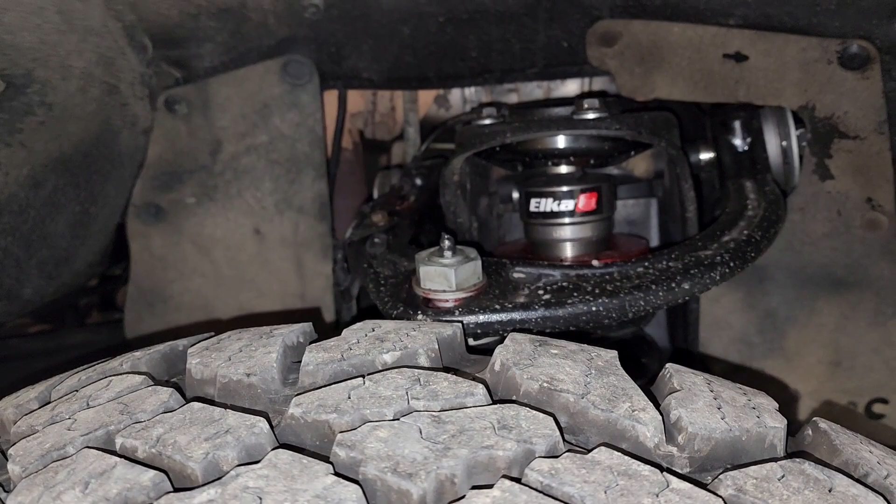So I'm gonna give you guys a quick look of what I've done so far, and then we'll get right into today's video. If you've watched my recent videos, you would have seen I was doing a bunch of work, changing out the suspension and other stuff. Over in the front here, I got my Elka coilovers, got those installed, and up top here I got the SPC adjustable upper control arm.

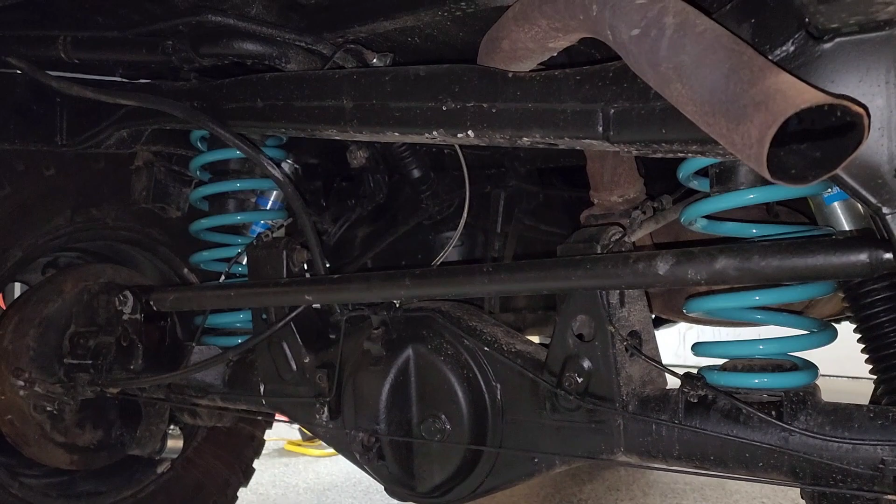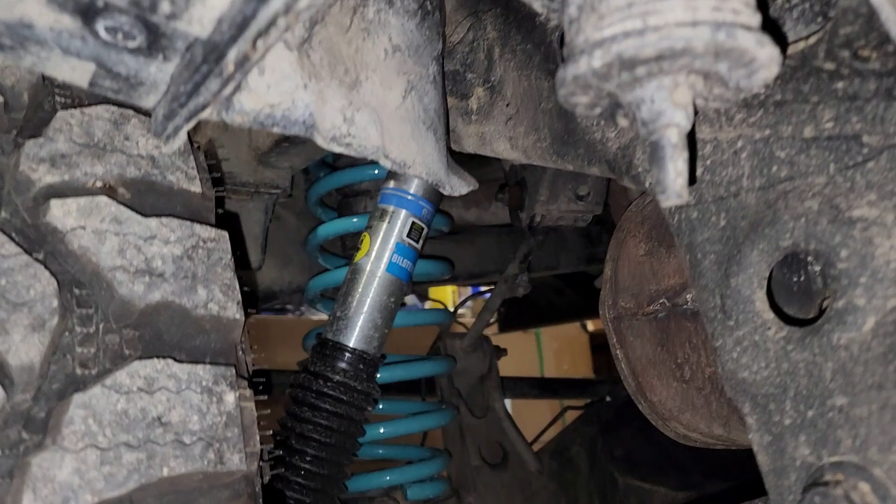Over in the back, got the new Dobinson's Land Cruiser front springs, paired with the Bilstein 5100 shocks. Those shocks are actually for the 4th and 5th gen 4Runner, so it gives you a little bit of extra lift on the 3rd gens. That's the main thing I've done, and then of course I got the 5.29 Yukon gears and my 35-inch tires.

So the last thing left to do before I can get this thing back on the road is get an alignment, which I have an appointment for in a couple of days. But before the alignment, I actually have one last thing to install, and I'm really looking forward to it. So I'm gonna give you guys a look at what it is, and then we'll get into the install. All right, so this is what I got right here.

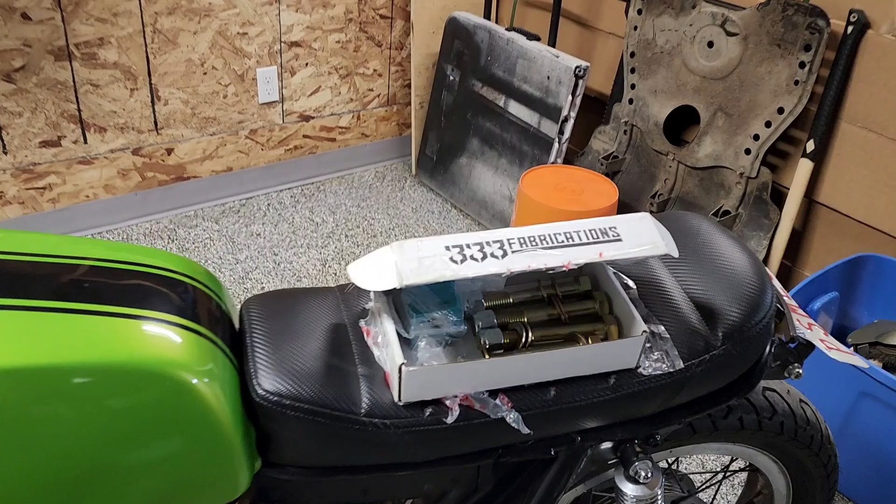This is the Cam Eliminator Kit I got from 333 Fabrications. I'll link it in the description below. It comes with these nice big bolts - when I get the old ones off we'll do a quick comparison, I'm pretty sure these are much beefier. It comes with some instructions, just a QR code, and it comes with the plates.

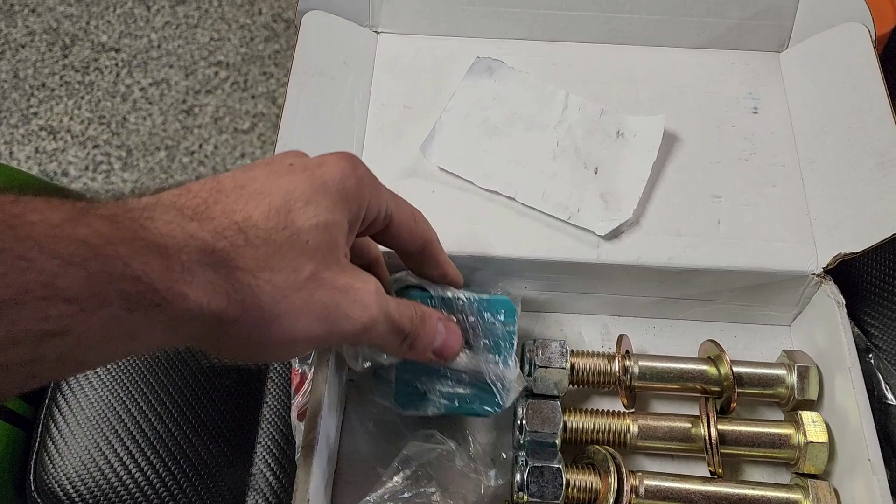So these actually come bare steel. I got them powder coated this color only because I got my rear springs coated in the same color, and it was cheaper to just do the same color. That's why they're blue, and I think they'll look pretty cool.

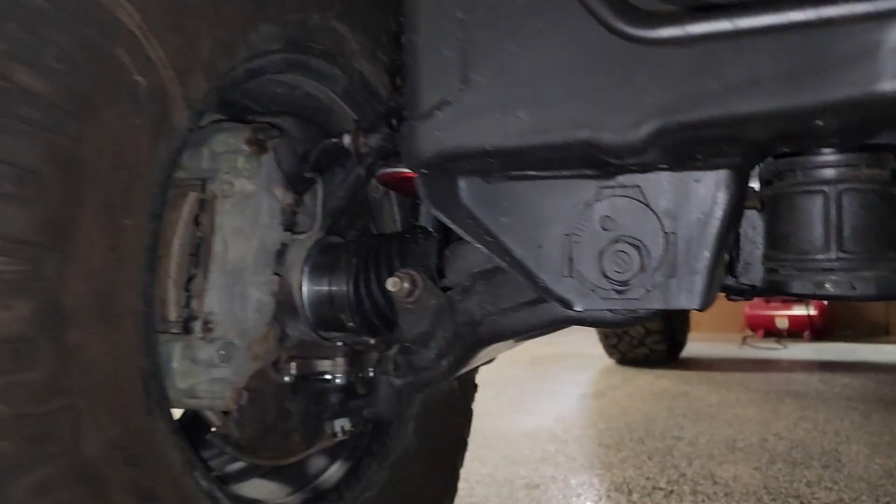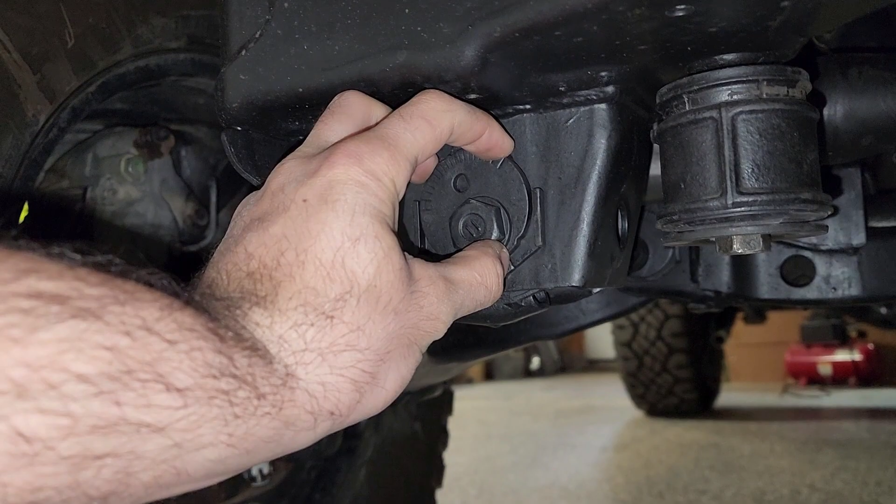So let's have a quick look on how this actually works and what the purpose of it is. If we get to the front of the vehicle, on the lower control arm here you have these adjusters, one in the front here and one right on the back. This round thing - basically you loosen this, turn it, and you can adjust it that way. Because it's round, the idea is if you're doing really hard off-roading, this thing can spin and mess up your alignment.

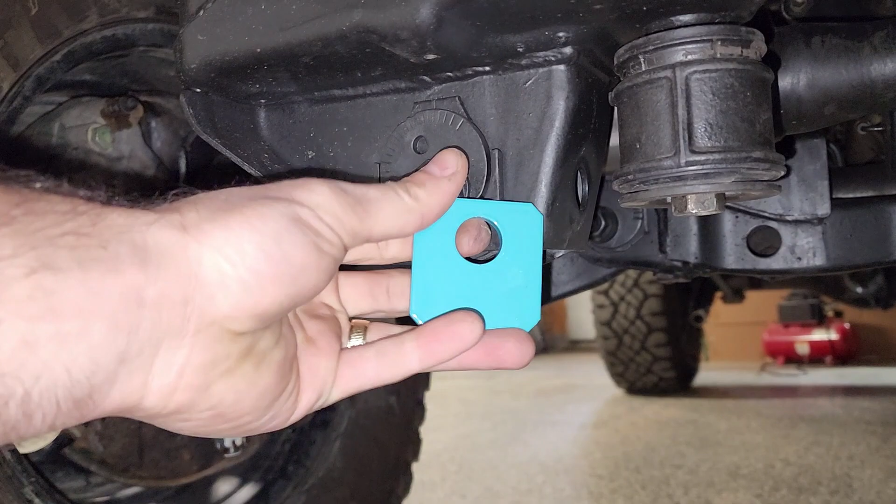So that's where these come in play. Because of the shape of this, because it's square, it's going to replace the round thing, and it's going to be locked against that right there. So once that's in, there's no way for this to spin around. Once it's in, it goes either like this or like this, I believe, so you get 3 adjustments. But once it's in, like I said, there's just no way for it to spin. Hence they're called the Cam Eliminator Kit, and they're supposed to keep your alignment permanent.

Now one thing to note is that it's very common for these 3rd gen 4Runners to have these bolts completely seized, and you may need to cut it. If that's the case for you, good luck, it's a bit of a pain. Mine fortunately are not seized because I did get an alignment like a year ago, so I know they're not seized. So I'm just gonna pull these off, replace them with new ones, and we'll be good to go. So let's get started.

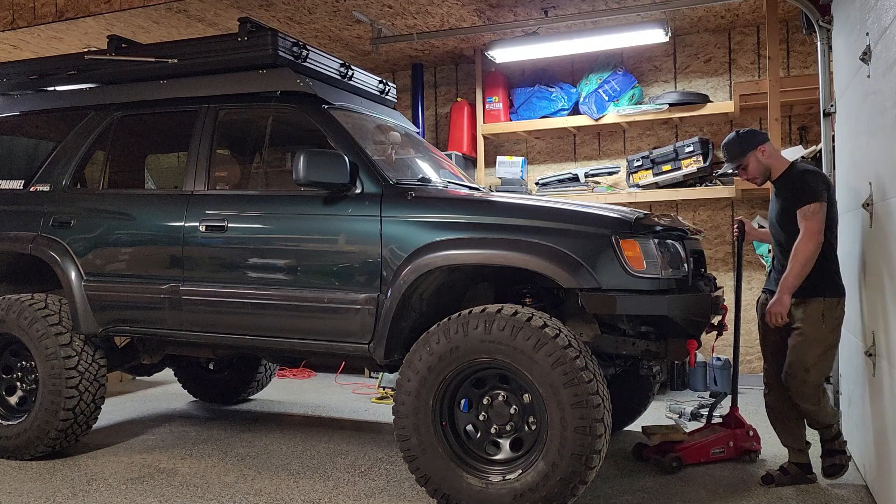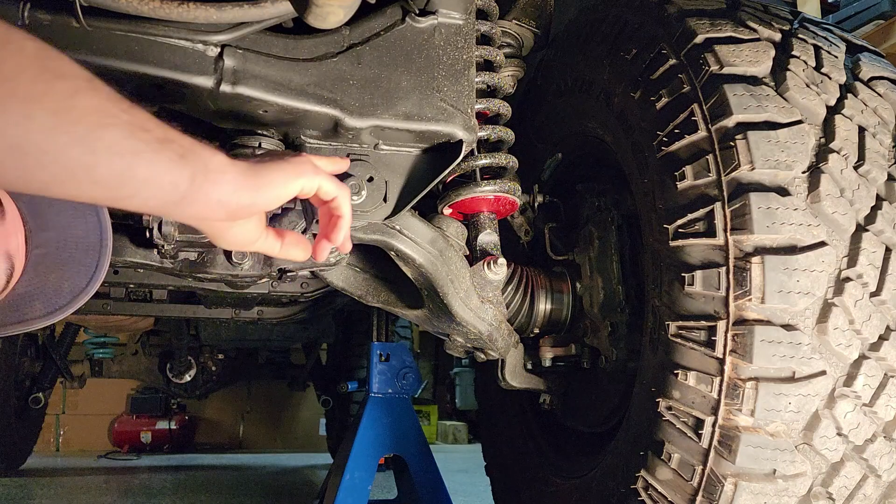So I have gone ahead and loosened this one already, so I'm just gonna go ahead and take it out. So there it is. And just to do a quick comparison, you can clearly see the difference.

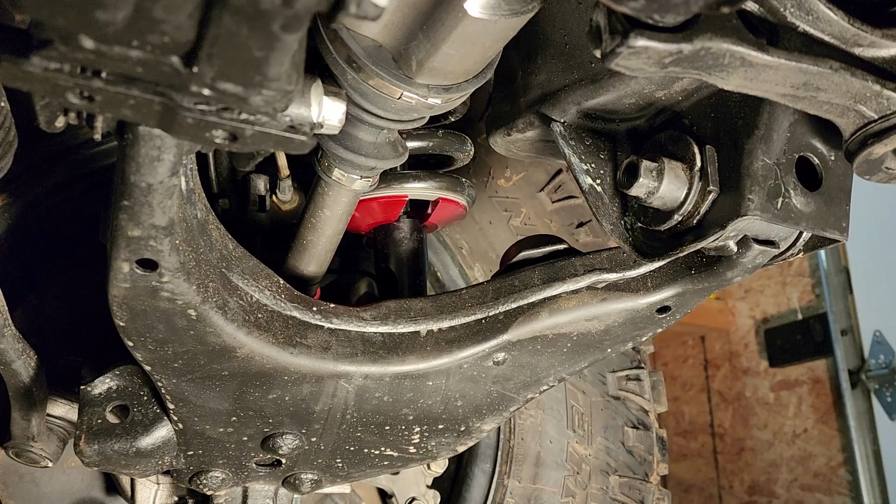All right, so with that bolt out, over on the back here, right here, we can just pull this off. I just used a little pry bar in there just to kind of pry it a little bit - it's already loose so it just comes right off. Now this here, we can just use a rubber mallet to hammer it, and it should just slide out from the front here.

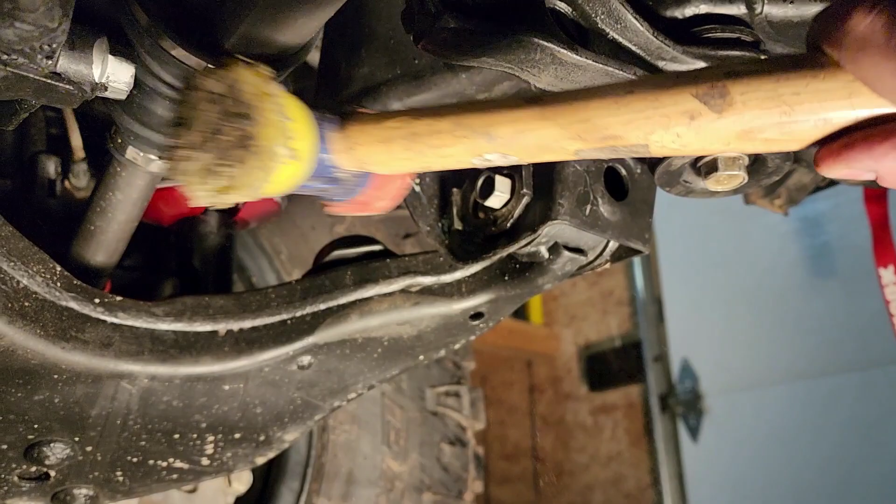So there it is, we're just gonna pull this out. Probably have to use a pry bar. You can see all the rust that's in there and get it out.

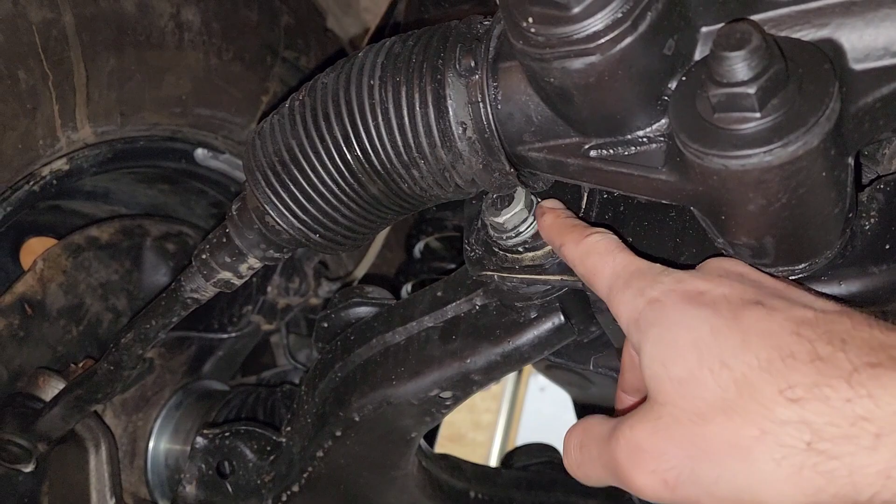So with that in place, something I noticed - for the rear bolt right here, I actually got it loose already. But what's happening is I can't get this bolt out because it's going to hit right here, which is really annoying.

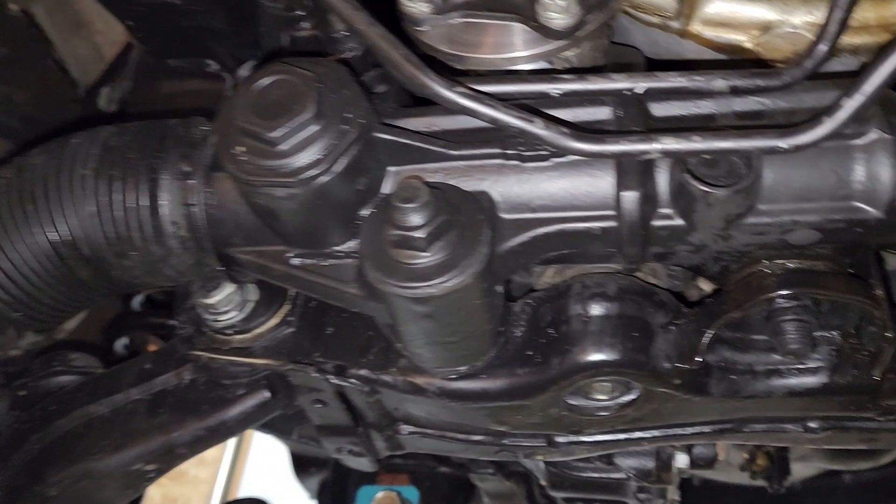So what I'm going to have to do is loosen my steering rack here. I believe it's this bolt and this bolt. Then I should be able to move this just enough to get the bolt out and put the new one in.

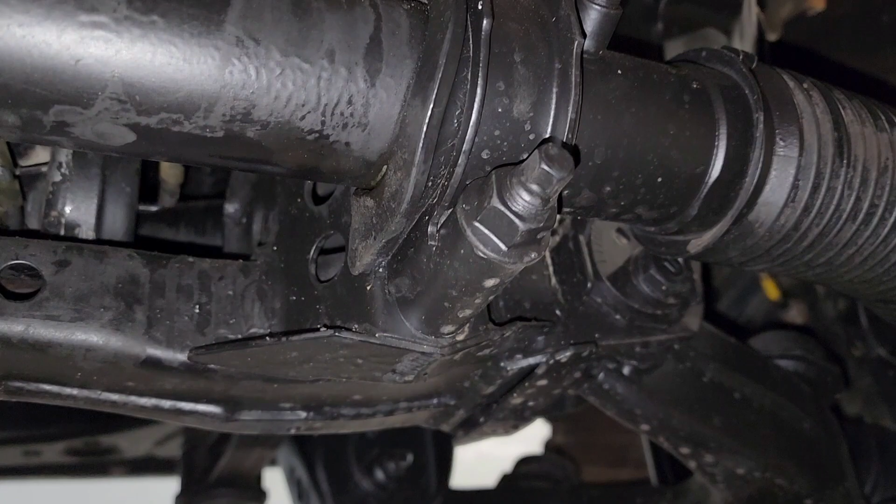Same thing on the other side, on the passenger side - the bolt is right here, and again it's going to hit here. So I'm going to have to loosen these mounts, and that should give me enough space to get the bolt out and get the new one in.

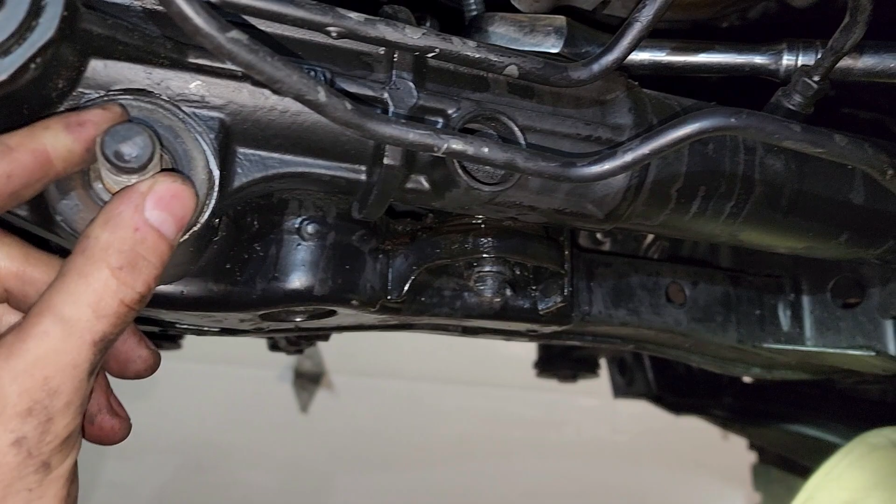All right, so we got that one off, and this is the next one I'm getting. I have my ratchet up there, so you can kind of see. Don't have too much room to work, but it works.

I just wanted to show what I've done here. Got that bolt off, and on this side I loosened this nut and that bolt up top. Now the whole rack is free, so I can put a pry bar here or here, anywhere really, and pry the whole rack back just enough to get that bolt out as well as that bolt. I'm going to go ahead and do that so we can get this job finished up.

All right guys, another quick update. There's a really long bolt here, and I managed to get it off. I think mine was seized or something, but it was really hard to get off.

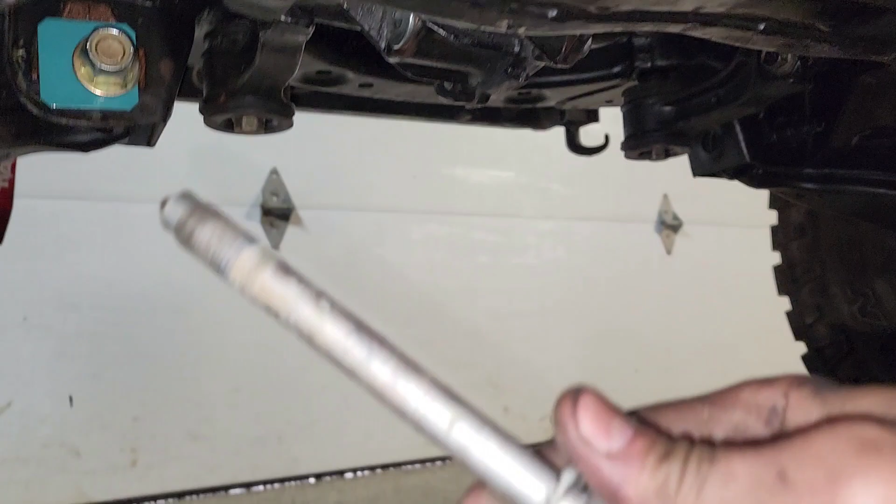I had to hammer it out of there, and even then it was still very hard to get that bolt out. I did manage to get it off - there it is, got that out. Basically, I took this bolt off and then had to pry this back and push it up. It was not easy at all, but I managed to get it out.

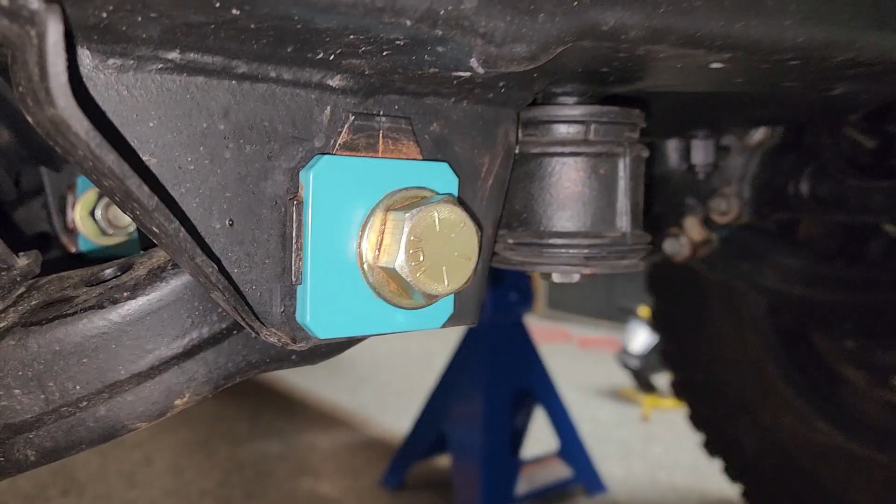All right guys, it's actually the next day. I did manage to get everything done yesterday, but what I thought would be a 30-minute job ended up taking me the entire day. This was not an easy job - it was kind of a nightmare, I'm not going to lie.

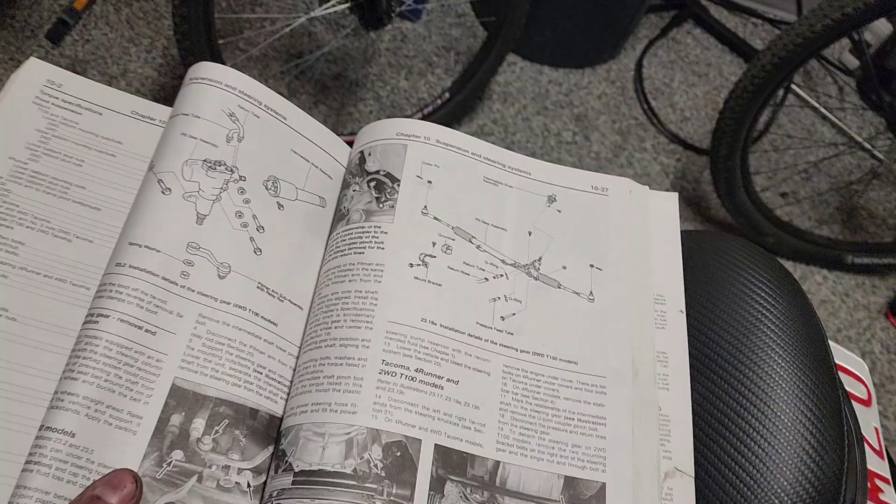If I had to do this again, I'd probably take the steering rack completely off, disconnect the hoses and everything just to get all the clearance. But the way I did it worked, though it was really hard and took a while. So I'm going to show you a few things that might help if you're doing this job - looking at this diagram here, this is from my Haynes manual.

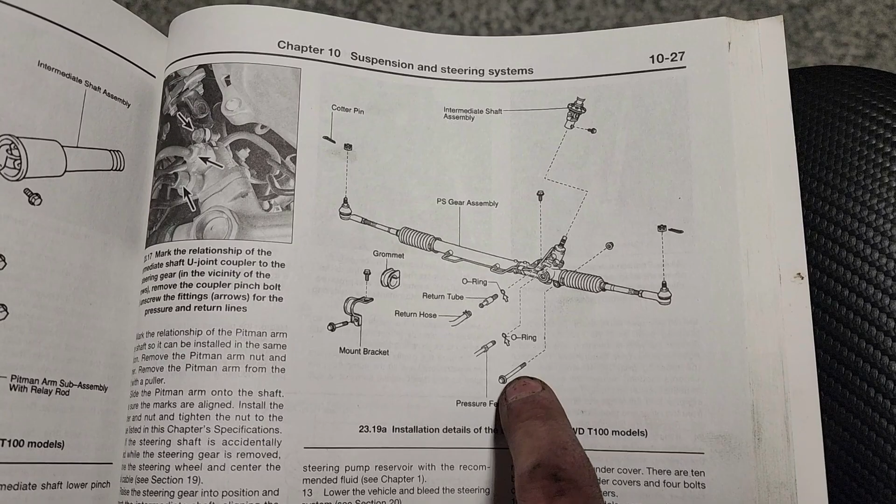So there's the steering rack, this is if you were looking at it from the front of the vehicle. One thing that really held me up is this long bolt right here that goes right there, and there's a nut on the backside. That should just come right out.

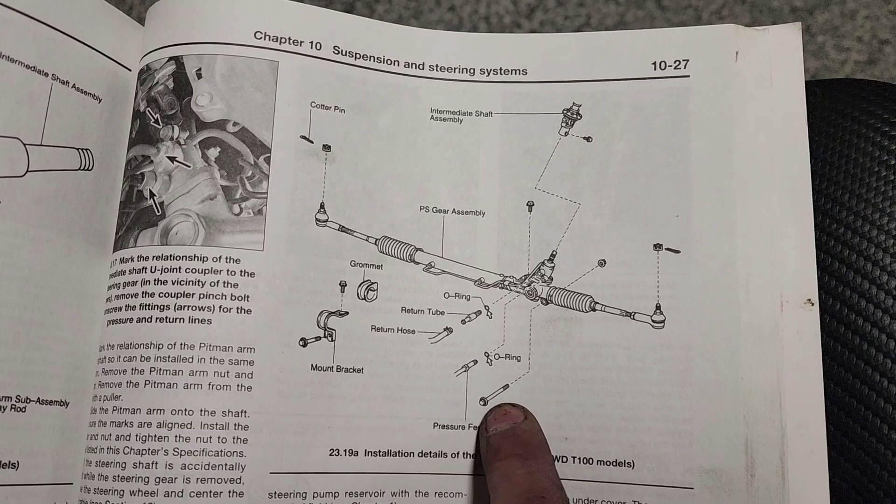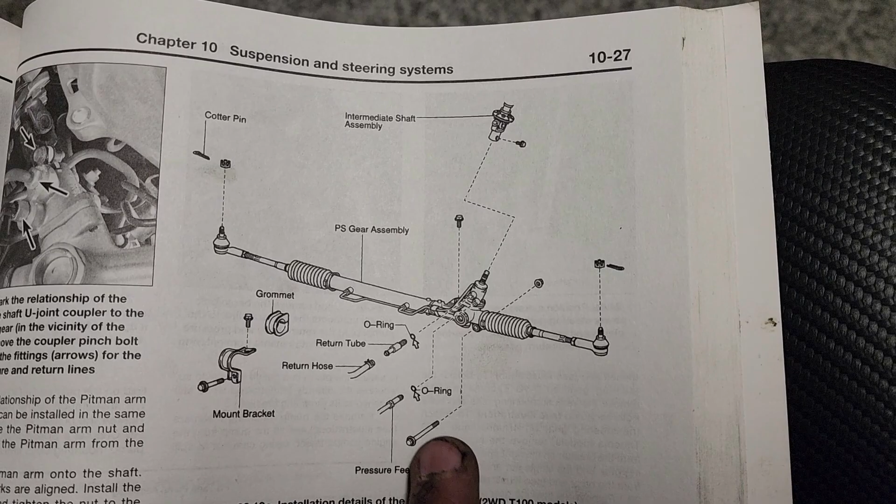But when I got mine out, I realized there was just a slight bend in that bolt. I don't know how that happened or when, but it was stuck in there. I managed to get it out, but it took quite a while. Now I have a new one on order, so right now I just left that empty - when I get the new one, I'll put that through.

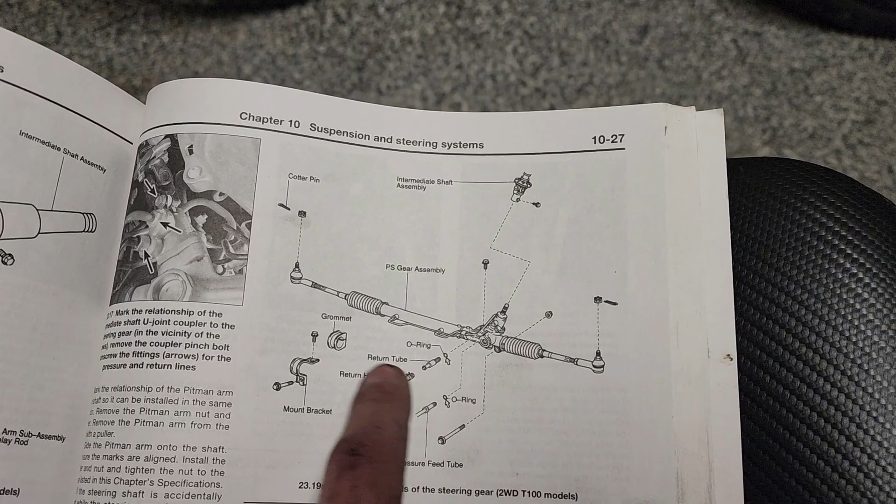The other thing is that normally you'd have a sway bar there as well, which you'd have to take out. I took mine out quite a while ago, so it wasn't there.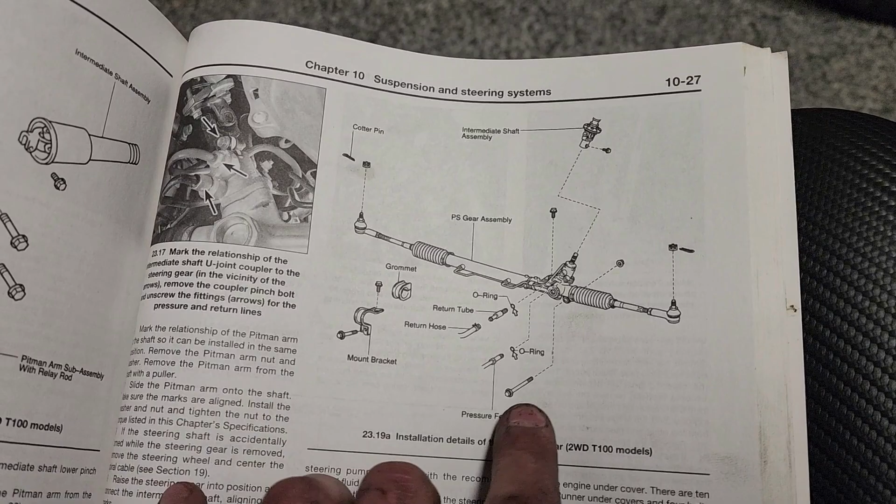Other than that, a couple other things to point out are torque specs. That big bolt there is this one here, left through bolt and nut - that needs to be torqued to 151 foot-pounds. Then the bracket on the other side has a bolt and nut, right here - bracket, nut, and bolt need to be 123 foot-pounds.

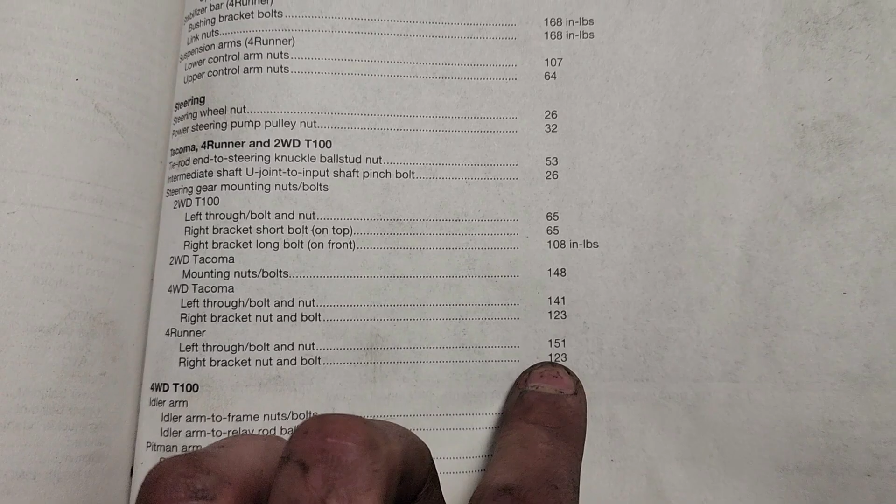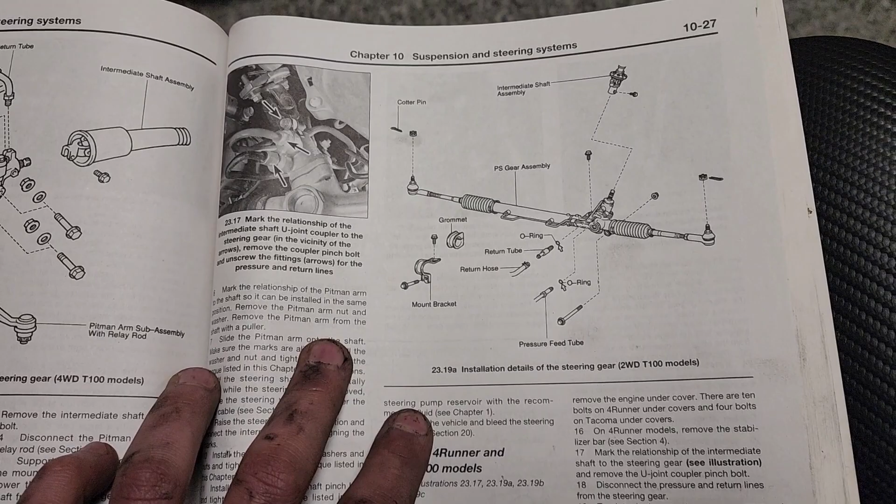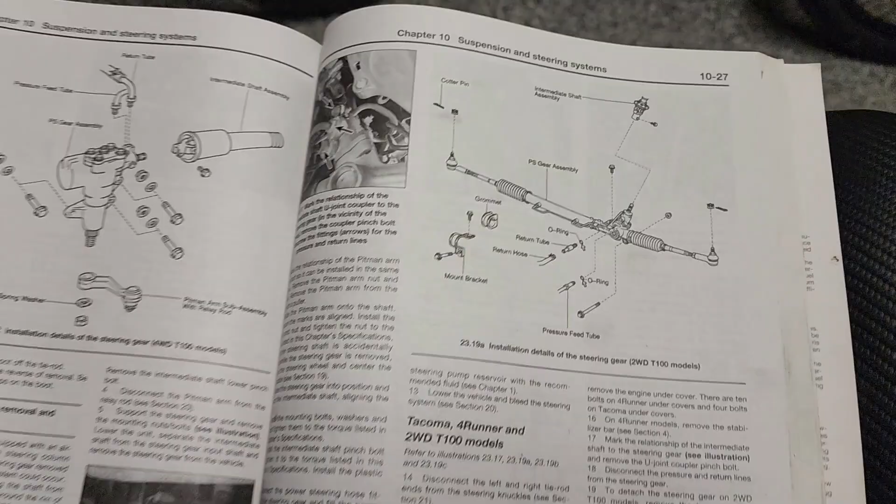And then the last thing was the nut or bolt at the top, I think it's this one. This manual for some reason doesn't show the torque spec on that - I think it's like 120 or something, but I could be wrong, so don't quote me on that. Anyway, I hope that helps. Like I said, this is just the Haynes manual - really good to have, it's got a lot of good information in it.

So the last thing left to do is torque the actual cam eliminator that I just installed. The instructions say to drop the vehicle down first so all the weight is down, then torque it to 110 foot-pounds. We'll do that right now and we'll be all done.

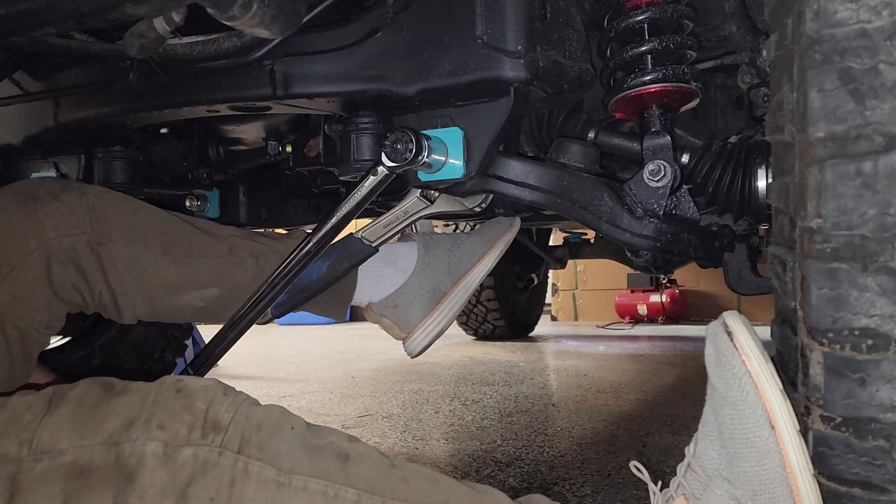All right guys, the cam eliminator kit is installed. That was an absolute nightmare to get done, so I'm glad it's done. I hope I don't have to do that again.

Just going for a super quick drive right now to make sure everything feels good, and then I'll be getting my alignment done tomorrow. Can't wait for that to be done, because then I can actually start driving and breaking in my new 529 gears. I'll have a video coming out on that, talking about the 529 gears and how they feel, so stay tuned for that. Thanks for watching, and I'll see you soon.